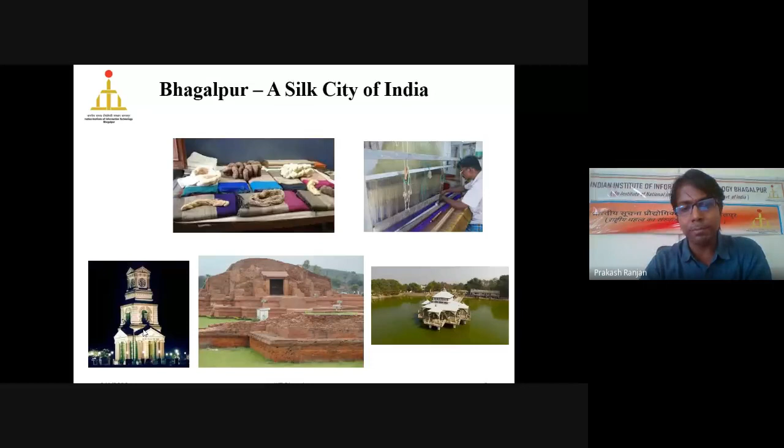Next, I would like to say a little about Bhagalpur city. It is very famous for its silk. If you Google it, you will find that Bhagalpur silks, especially silk sarees, are very famous. It is also nearby the ancient Vikramshila University, so it is a very beautiful city. IIIT Bhagalpur is right on the bank of the river Ganga, and our campus is totally greenish, with around 650 mango trees. You can imagine how green our campus is.

I would like to welcome everyone, especially Rathore sir and my friends Neha and Abhishek, to come and visit. We will have a great time here. So here we are having this webinar team for today.

I would like to say thanks to Shyam sir, Rajiv sir, and also to my colleague and friend Neha. She used to call me and have a lot of discussion. I have also disturbed her a lot of times on how to get properly prepared. So thanks for bearing with me.

One more thing I would like to tell you regarding NIT Jamshedpur. As I told you earlier, I have done my PhD from NIT Jamshedpur. You will be happy to hear that it is now called a mini IIT Roorkee, because a lot of your faculties are nowadays doing PhD from NIT Jamshedpur. You can start from Chetan Burde, who is now like an elder brother, younger brother to me.

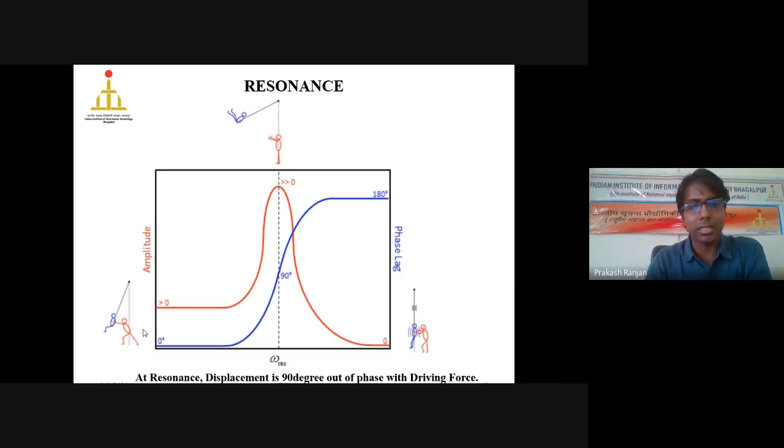So let's begin with the core topic of our today's discussion, that is metamaterials. As we have listened earlier, metamaterials are basically made up of the word meta. Meta is a Greek word and it means beyond. So metamaterial implies a material which is beyond our reach.

If you look around yourself, you will find that you have lots of materials. If you try to characterize them, meaning analyze their properties, you can place them in 4 categories. So what we can do is a simple experiment: we are going to divide available materials into 4 types, based on permeability and permittivity.

Let's remember our 10+2 physics, the electric force. The electric force between 2 charges depends upon the charge quantity as well as the medium in which the charge is placed. That medium parameter is defined by permittivity. That is why we have 1 over 4 pi epsilon naught epsilon r, where epsilon r is the relative permittivity, times q1 q2 over r square. Apart from the distance and the charges, permittivity defines the medium, which is why you can have different forces acting on the same charges if you change the medium.

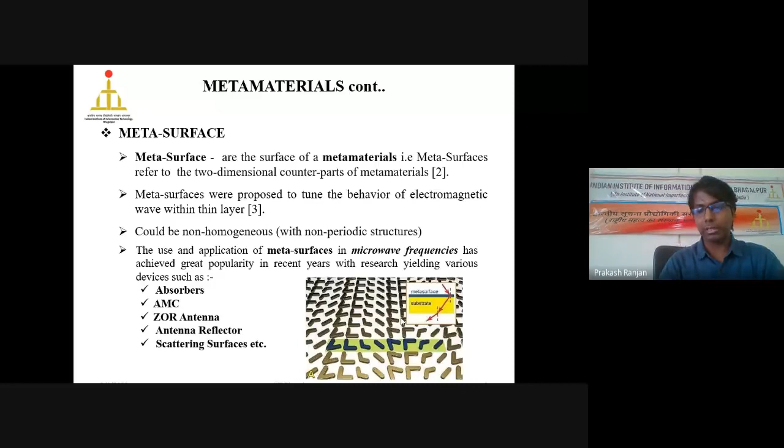As I said earlier, to have a meta surface you have to find out the property of normal surfaces of normal materials. We all know from basic physics that a normal surface has a particular arrangement of crystals or atoms, and that must be periodic. HCP, lot of things we know - packing, lot of patterns we are having. With that packing, it gives a particular periodic arrangement. So if you want to generate a meta surface, something must be periodic.

Second thing - every surface is made up of a unit that we call atoms. Similarly, in the case of meta surface, we need something which gives the unit - here we say it is a unit cell or meta atom. Also, in normal surfaces, the atoms are very small compared to the total surface size. Similarly, in a meta surface, the size must also be very small.

Now, one thing is very interesting here. If I say small or large, it is totally a subjective matter. For one person, small could be 0.1mm, but for another person, small could be 1 meter itself. A person working in the range of mm will say 0.1mm is large, but a person working in the range of kilometers will say 1 meter is nothing. So the size is totally subjective - one has to take a particular unit.

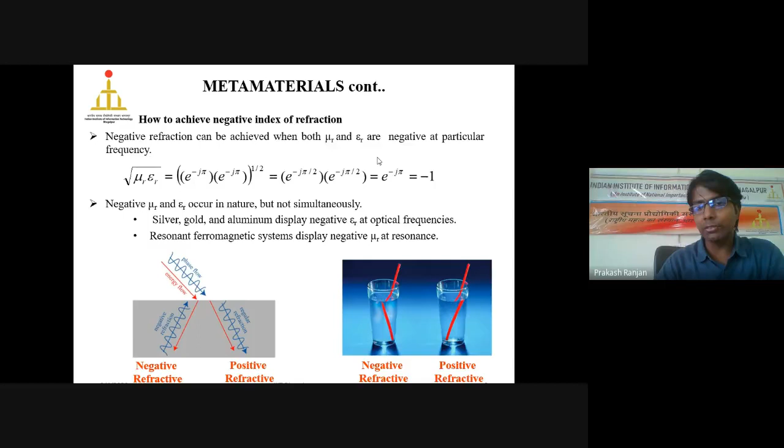That inspired scientists that if you want to tailor or change the electric behavior, that is permittivity, or change the magnetic behavior, tailor the permeability, you have to use resonance. At resonance, you always get totally different behavior. So if someone wants to achieve a material that falls into the third quadrant, when right now the material lies in the first quadrant, you have to make it leave its position from the first quadrant and come into the third quadrant — obviously you have to achieve resonance.

It's just like an ordinary experiment. If you ask your friend to leave their position and go somewhere else, the very first thing is you have to ask your friend to please stand up, right? Similarly, if I want my permittivity and permeability to fall into the third quadrant, I must ask my material to leave the property of the first quadrant. That is why we are interested in resonance, because at resonance the material changes its behavior, leaves its natural property of constant permittivity and permeability, and gives a totally abnormal behavior.

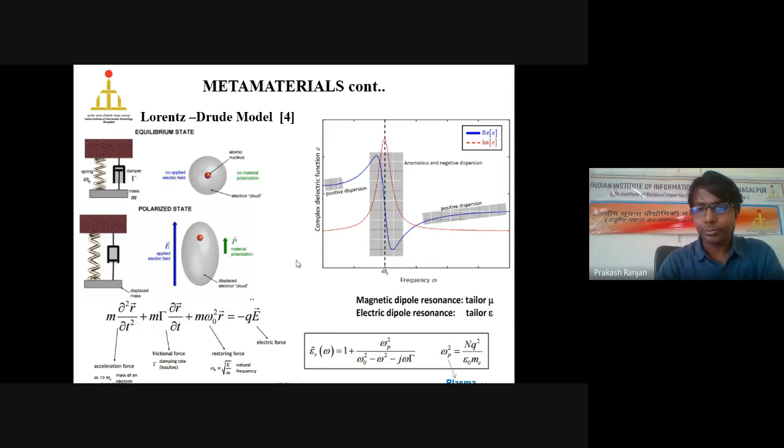Now, as you see, there is a plasma frequency term. If you look at the behavior of any material, this will give you the importance of plasma frequency. If you apply a wave of low frequency, the material will be transparent. If you further increase the frequency, it shows absorbance property. Then later on it gives reflection, and above the plasma frequency, it becomes transparent once again. So the plasma frequency gives you the frequency at which your material becomes transparent.

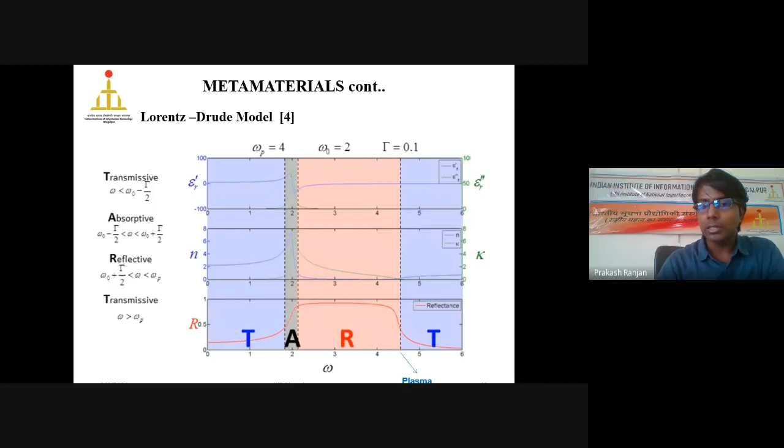And this is very much applicable — look at metal sheets. Metal sheets are very shiny in light. The reason is, apart from the skin depth property and the lossy nature of the metal for electromagnetic waves, the plasma frequency of metal sheets is much higher than that of the light wave, and that is why the wave gets reflected from the metal sheets.

So here it is the history, as I said earlier. The Veselago, I have discussed earlier, in the year 1968, he predicted something.

Later on, in the year 1996, Pendry, the figure I have brought in the left side bottom, was working on the experiment of bringing down the plasma frequency of any material, and indeed he ended up with the discovery of metamaterial. He is actually, I would say, the father of metamaterial. Later on, the work has been forwarded by Smith and Shelby, the right side figure. So these are the people, these are actually the inventors, I would say, of the metamaterials.

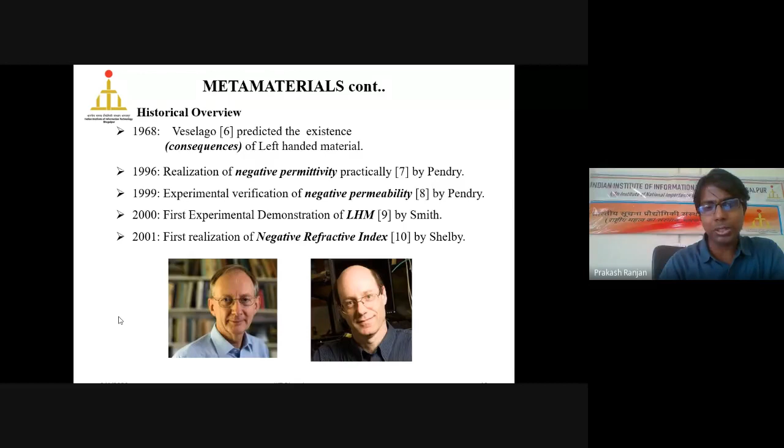So in the year 1996, you got the first experimental verification of negative permittivity. Later on, in 1999, negative permeability. In 2000, you have the first experimental demonstration of left-handed material, that means both negative permittivity and permeability. And now in 2001, by Shelby, you have the proper negative refractive index. So it is by and large, we have just passed 20 years down the line where we have achieved the metamaterial.

As I said earlier, in order to achieve the metamaterial property, you need to have electric resonance. The question is, how do we achieve the electric resonance? The answer is very simple: you just take a wire, make it in the range of lambda, and it will give you the resonance property. Similarly, for magnetic resonance, give a circular shape to the resonating structures.

This led into the electric and magnetic resonance simultaneously, and once you have electric and magnetic resonance simultaneously, there is a chance that you will achieve the metamaterial, and that is exactly what happened with Smith in the year 2000. He has demonstrated the metamaterial practically.

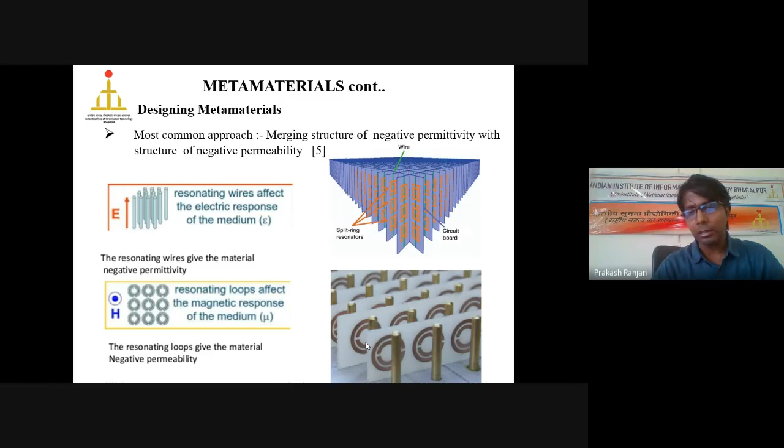So now let's get into the application of metamaterials. These metamaterials have very interesting applications. One of the very interesting applications is cloaking.

So you can remember, especially my students, the movie Mr. India, the old movie, where the hero Anil Kapoor used to become invisible by pressing a simple button on a watch on his hand. He used to press a button and he becomes invisible. A similar story is shown in the Hollywood movie Hollow Man, where he injected a material and by that injection he becomes invisible. The same thing people have been able to achieve using the property of metamaterial at a particular frequency.

People have achieved this invisibility at a particular frequency. It is a matter of time before people come up with a device that will give invisibility in the visible spectrum. Once it gives invisibility in the visible spectrum, you can make things invisible. This is a totally innovative area people are working on these days, using meta surfaces and metamaterials, and due to that property only it has been achieved at a particular frequency. Let's see, the time will come when one of you will work on this topic and achieve cloaking for a particular band of the spectrum.

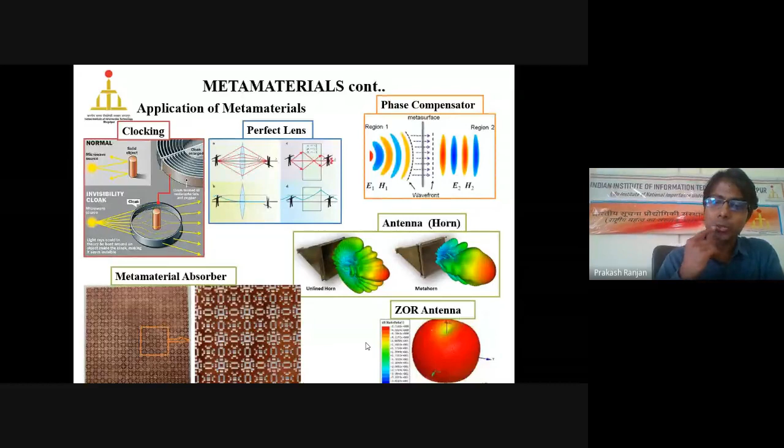Second thing is the metamaterial absorber. The metamaterial absorber, by its name itself you can guess its property. It absorbs electromagnetic waves. Remember the stealth plane. Your fighter planes nowadays are stealth planes. The stealth plane has the property that it absorbs the incident wave coming from the radars, and that is why it is not visible to the radars. That has been achieved with greater efficiency by metamaterials, and that is why it is termed as metamaterial absorbers. So in this presentation, I will give more concentration towards your ZOR antenna and metamaterial absorbers.

To work in this microwave domain, I would like to introduce two softwares which are very much famous these days: one is CST and another is ANSYS HFSS. There are other softwares like FEKO and Tarang. Tarang is Indian developed, but it is still in the development phase. I would not say it is totally matured, but CST and ANSYS are both matured commercially available softwares.

Even though it costs much, you can even find a crack, but you have to use these softwares to simulate the structures. We at IIIT Bhagalpur have introduced these softwares in the BTech curriculum itself, so that students passing out from IIIT Bhagalpur will have a little bit of flavor of microwave. These simulations have been done at IIIT Bhagalpur by the students themselves. So you can convince your students to work in this domain, provide them the software, and teach them so that they can work in this field.

So this is the simulation of simple E-plane and H-plane.

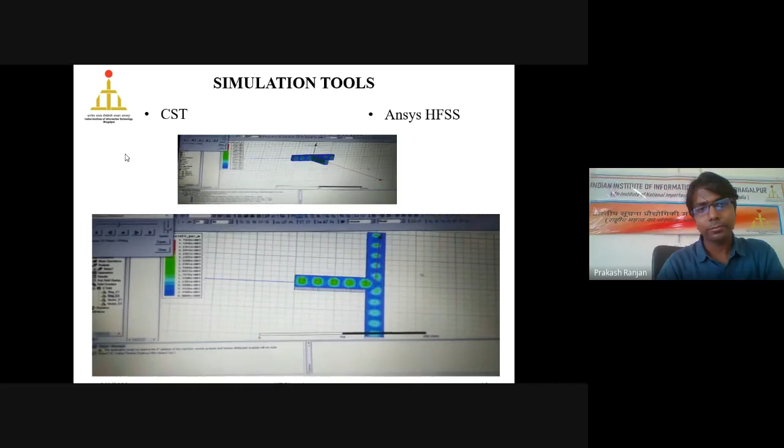Let's try to analyze the metamaterial in terms of a transmission line, with the help of the basic transmission line model. We all know that basic transmission lines can be modeled with simple R, L, G, and C, where resistance, inductance, conductance, and capacitance are used as parameters. We can model any transmission line using these four parameters. Now if you look at the lossless transmission line, imagine your transmission line is lossless - what we are actually trying to do is model a transmission line made of metamaterial, so that we can extract information and apply it for practical application.

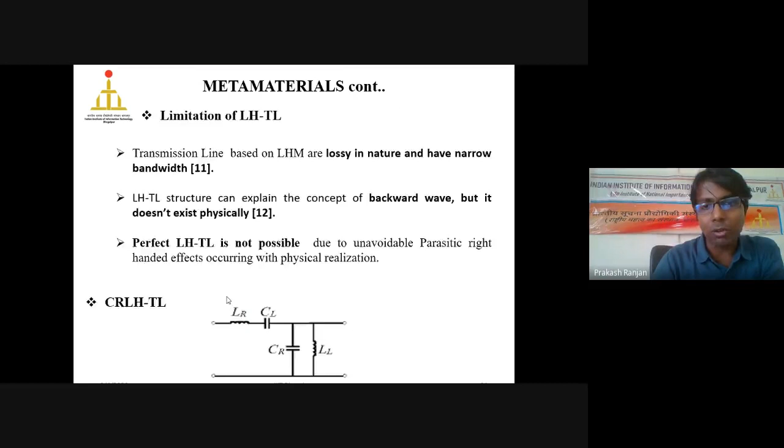So if you have a composite structure, obviously the diagram of beta versus frequency must be combined, because you have to combine the circuit. We are going to combine the purely right hand transmission line circuit with the purely left hand transmission line circuit. Then obviously the graph you get will be the combination of both these two graphs.

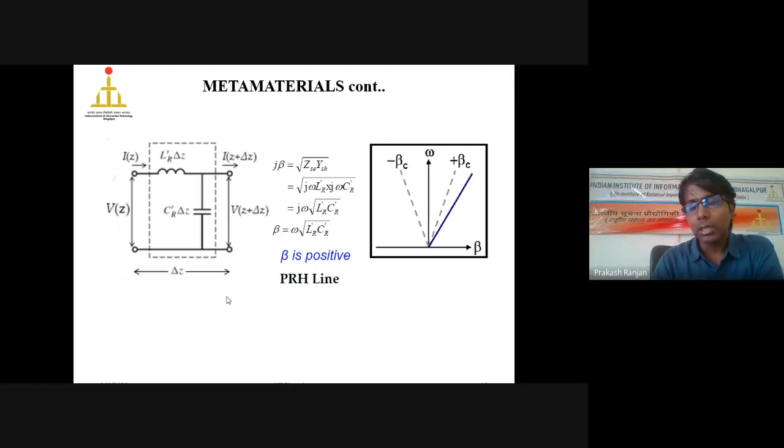Look at this - this is for the right side I'm talking about. The right side graph is the omega versus beta diagram for your purely right hand transmission line. This is for your purely left hand transmission line. So obviously, if I combine these two, it will give the graph for omega versus beta of the composite structure.

Now, if you look at this diagram, one thing you can notice is that there is a point where beta could be zero. The right side is for right hand, the left side is for purely left hand. Here you see the diagram for purely right hand transmission line, and this red side is for the composite one. For the composite one, you have the property of both right hand and left hand transmission line, and that is why you are able to achieve a point where beta is 0 at a particular frequency.

Now, beta 0 - why am I giving more stress on this? From our basic things we know that beta is nothing but 2 pi by lambda. So 2 pi by lambda, where beta is 0 means your lambda is infinity, right?

Now I haven't noted this down, but think of it this way: at a particular point in the diagram, beta is 0. Beta is defined as 2 pi by lambda, so if beta is 0, lambda is infinity. That means at a particular frequency the system behaves such that it gives apparently infinite lambda, just like an ideal op-amp has infinite gain with respect to input voltage, although it has a finite value. Similarly here it gives infinite lambda.

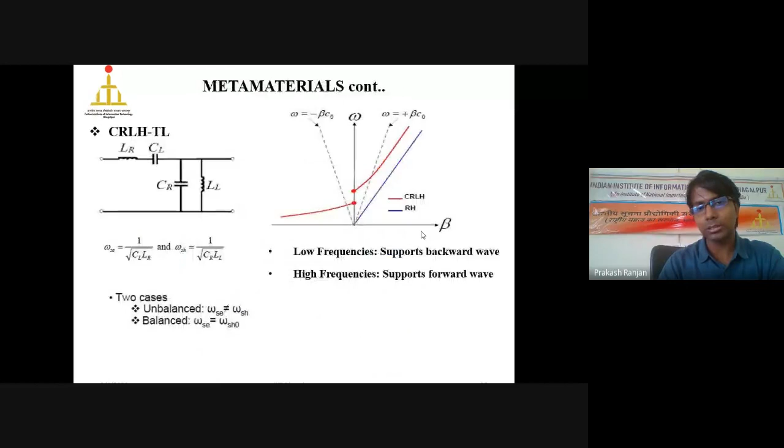So this has been achieved because of the resonance and of ZOR, because of the composite we have achieved. This basic concept of ZOR, or zeroth-order resonance, which I discussed earlier in transmission lines, has been useful to derive this ZOR antenna, and is very much useful.

If you look at the advantage that ZOR antenna brings, the basic things are: one, reduction in size, and second, the radiation pattern. These two things make ZOR antenna very much applicable.

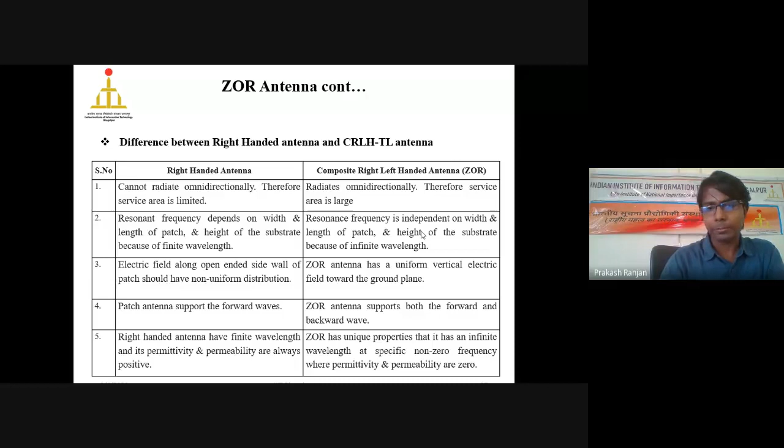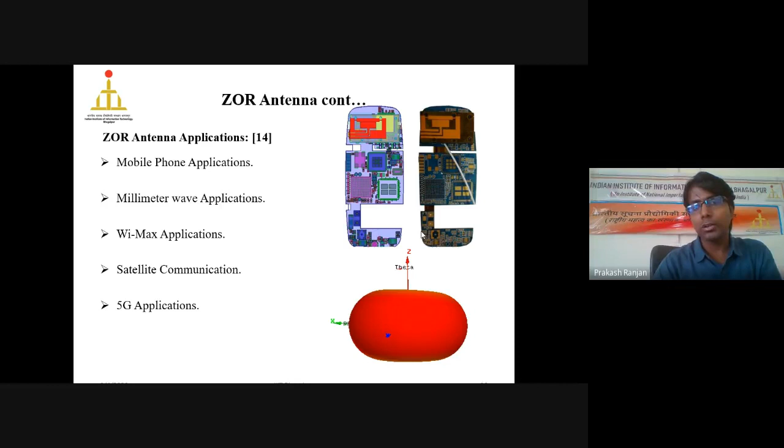In the very near future, you will see ZOR antenna being utilized in your mobile phones. Nowadays you are using the PIFA antenna, but soon you will observe that the same ZOR antenna is going to be used in your mobile phones, because it gives better gain as well as better radiation pattern. These are a few antennas, and this is the measurement setup of the antenna.

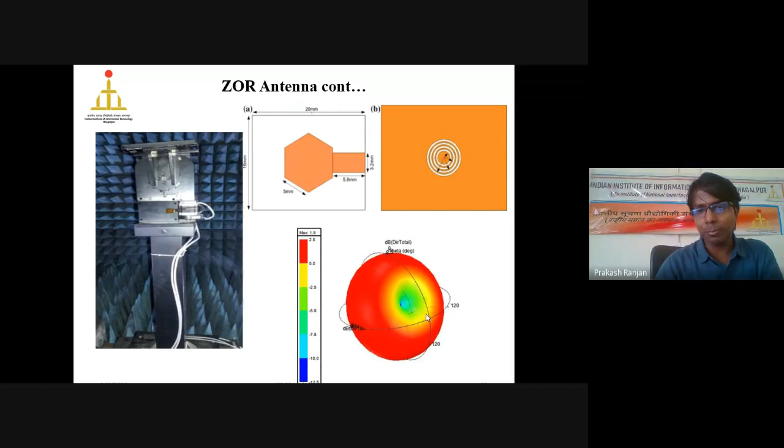These are another type of ZOR antenna. See, this one has a totally apple-shaped radiation pattern. Again, these are a few shapes that have already been published. So these are a few ZOR antennas.

With this, the basics of ZOR antenna covered, let's enter into absorbers. As I stated earlier, I will discuss two applications of metamaterials. One application was the ZOR antenna, and the other application is absorbers.

I'd like to give a little historical overview of absorbers. Our renowned scientist Sir J.C. Bose used absorber material in his oscillating tube device to reduce unwanted reflections occurring in his machine. He developed the oscillator tube, and that tube was giving some abnormal behavior because of the metal casing. So he brought a kind of material and placed it inside that casing so it would work properly. That was the first such work, I would say, in India.

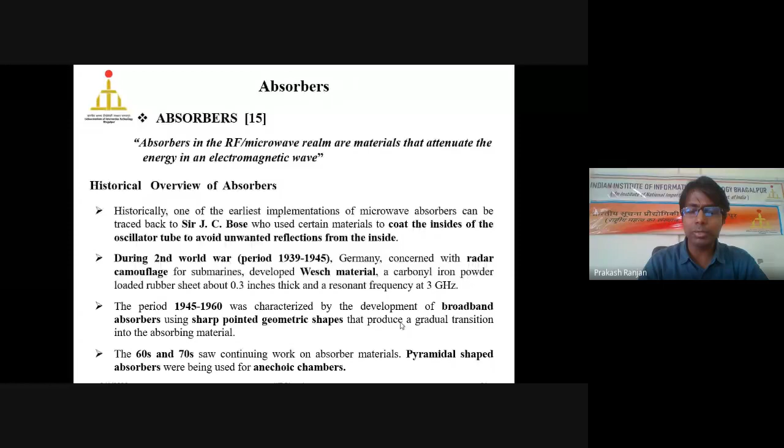Later on, absorbers became very useful in the Second World War, and progressively in the 1960s. One of the absorbers which is very famous, I would first discuss the conventional type of absorbers. If you look at conventional types of absorbers, there are two basic categories: one is the multi-layer type, and another is absorbers made up of dielectric materials.

Look at multi-layer absorbers: these are derived by simple stacking of different kinds of materials. But if you look at the other type, the pyramidal type structure absorbers, these are very famous for anechoic chamber applications. This has the advantage of giving broadband absorption, but the drawback is that it is very fragile.

To show you the application of absorbers, I would like to share something I came to know through the DRDO Pune lab. India purchased the Rafale fighter plane, which comes with a host of new technology. Among them was stealth technology, the stealth coating. France was not ready to share this technology at any cost. They said they could share all other technologies except the stealth coating technology.

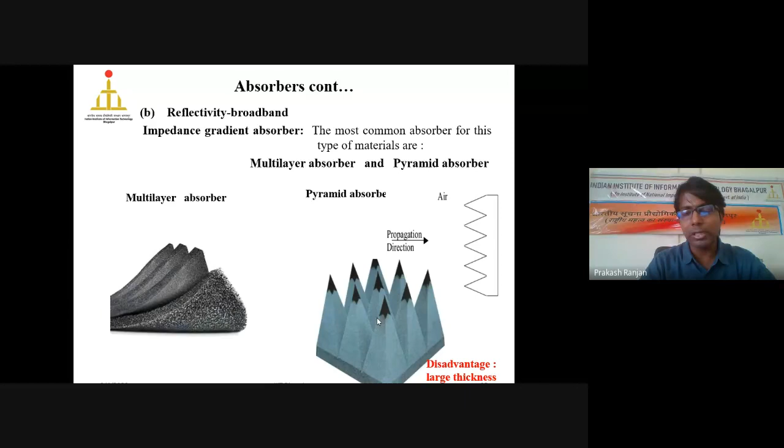So the basic principle of absorber, you all know its purpose is to absorb the materials. The absorber's purpose is nothing but to absorb any incident wave. So I would like to try to enter into the metamaterial absorber.

Metamaterial absorber is basically a 3-layer structure. The bottom side is always copper. The second layer will be a dielectric material, and the topmost layer will be a resonating structure. With this arrangement, you are able to achieve the metamaterial absorber.

So we all know that if there is a metal backing, the microwave is not going to cross this system. So with this structure, I can say this S21 becomes 0. This is the S parameter of microwave.

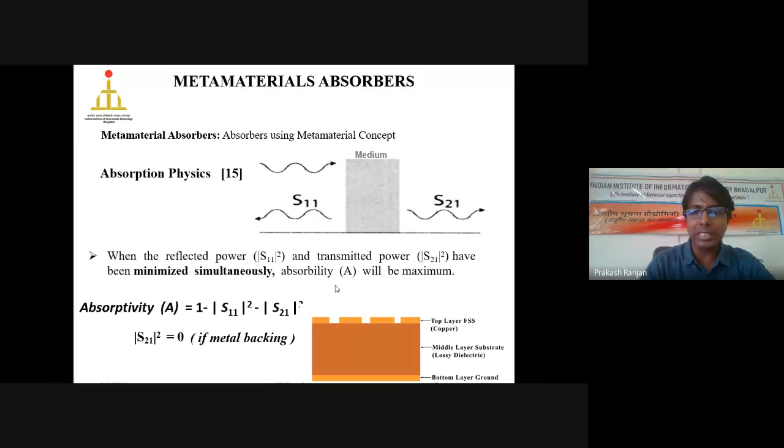So this is the incident wave, this is the reflected wave. You can see in the diagram, S11 is written there. S11 shows the reflected wave, S21 shows the transmitted wave. So as there is a metal backing, there will not be any transmission, so there is only reflection possible. So now I can measure the absorption behavior of the whole system by just measuring the reflected wave.

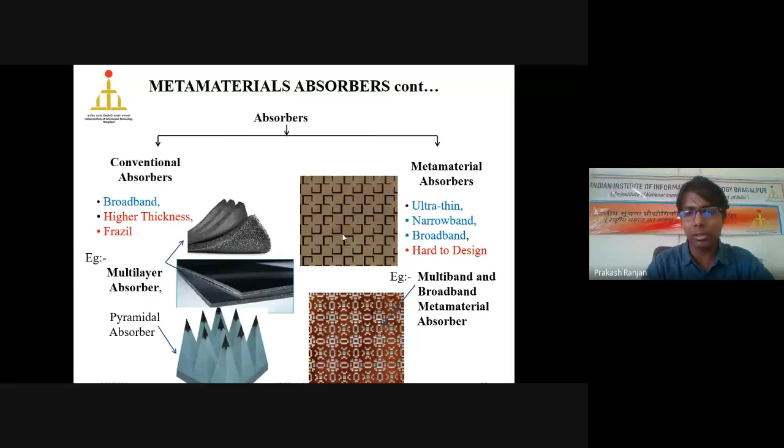So here is a diagram of the conventional absorbers and the metamaterial absorbers. We at IIIT Bhagalpur have worked on multi-layer absorbers as well as metamaterial absorbers. We are also working on multi-layer absorbers where you stack different materials, and these are a few diagrams which I will show you in the coming slides, which have been developed by ourselves at IIIT Bhagalpur. Now let's have a small discussion about the multi-layer absorber.

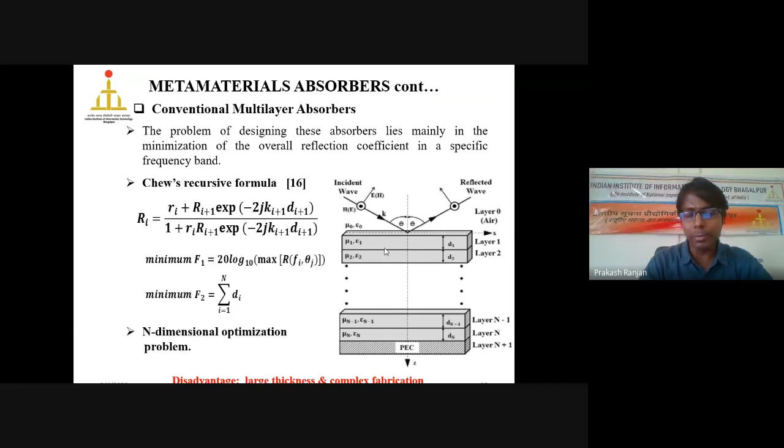We all know multi-layer, by name itself, is where you are stacking different materials with different thickness one over another to form a multi-layer absorber. Now this multi-layer absorber, if you look at it, makes an optimization problem. You can treat the synthesis of a multi-layer absorber as a problem of optimization, because you need to find out the correct material with its correct thickness and along with its correct position. With this, we have come up with results, I will show you a few of them in coming slides. So this makes an optimization problem.

Now getting back to the metamaterial absorber. The working principle of any metamaterial absorber is that when a wave gets inside the surface of the metamaterial, it just gets absorbed. This is possible only and only if there is no reflection from the surface of the metamaterial. So if there is no reflection, this is the impedance of the wave in terms of a metamaterial absorber.

This is the basic formula of electromagnetic theory, we can note it down. So if I apply this basic formula, it says that this Z omega is equal to eta naught only and only if the complex quantities become cancelled to each other. So if this complex quantity is cancelled to each other, it means they must separately be equal to each other. That means the real part of epsilon and mu must be equal to each other, and the imaginary part of epsilon and mu must be equal to each other.

Now with this formula, you must get an intuitive idea of why we are interested in metamaterial. Because to design the metamaterial absorber, we are tweaking epsilon and mu in such a way that at the absorption band, these two become equal. Once these two become equal, the wave gets inside and gets absorbed by the system.

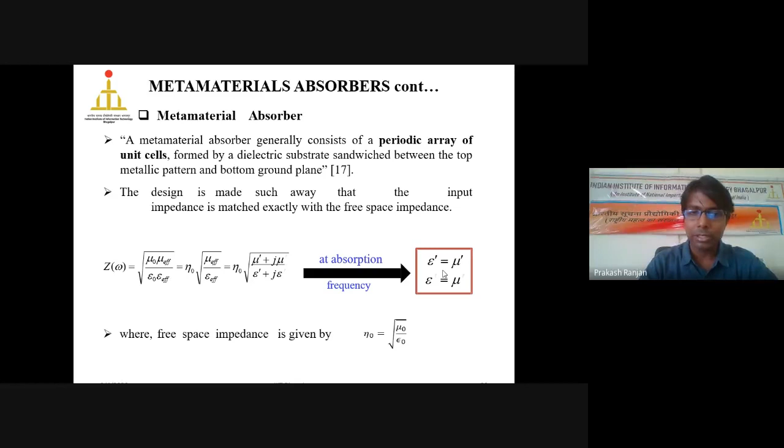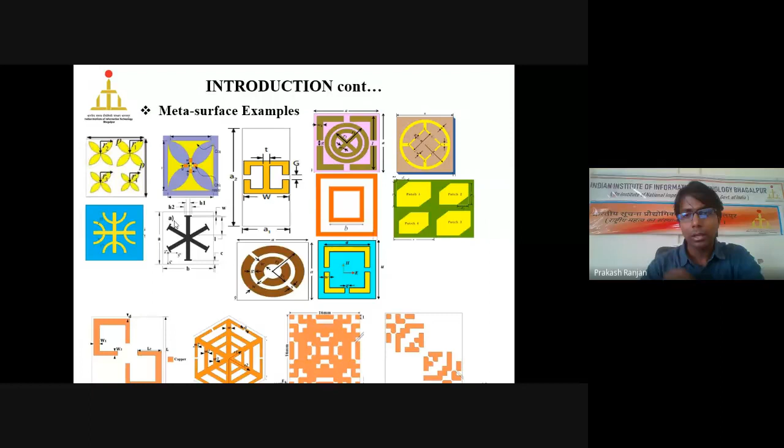So I will show you how we overcome this problem. But with the same technology, using hit and trial, we at IIIT Bhagalpur have developed these absorbers.

This leads into application of radars, where mostly radars basically work in the X band domain. Now radars are also available for L band domain. Russia has developed for that, but mostly radars are working in X band domain.

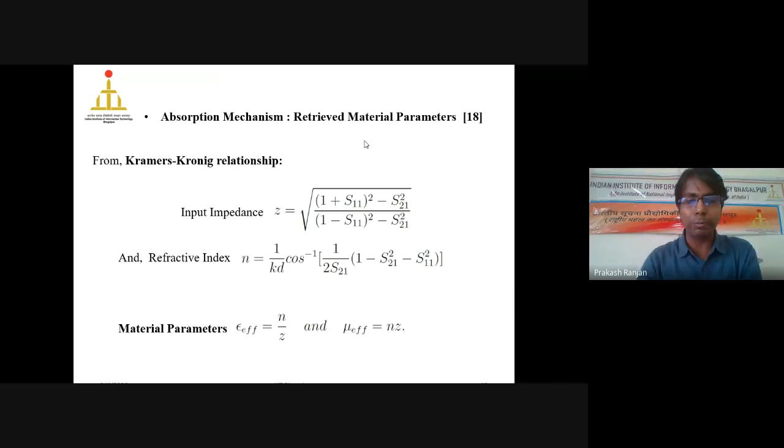So to analyze this property of absorption, we have derived using this theory few formulas like Kramers-Kronig relationships and other things, which lead into analysis of this absorption.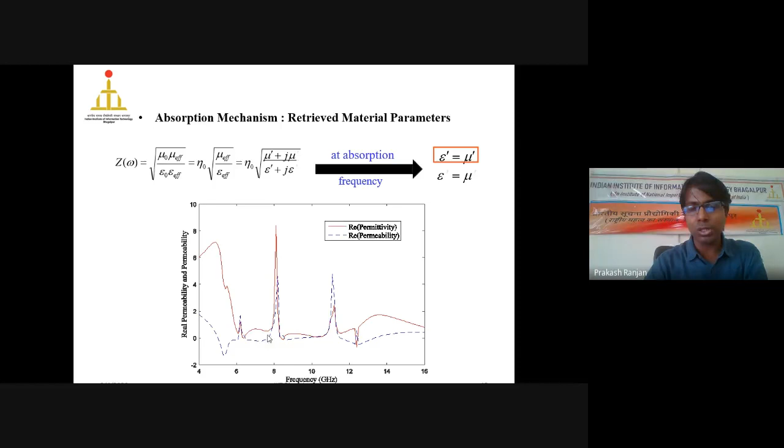Later on, we further analyzed in terms of effective parameters, that is mu and epsilon. You see the epsilon, both these real quantities are very much close to each other during the absorption band. You see the diagram, both these quantities are very much close to each other during the absorption band.

Second thing, we have also analyzed its surface current density. You see the surface current density, it gives the top and bottom current in reverse direction. This leads into the conduction, displacement, and conduction current, and once again the displacement current, that will lead into the complete cycle. So these are basically the analysis of how absorption takes place.

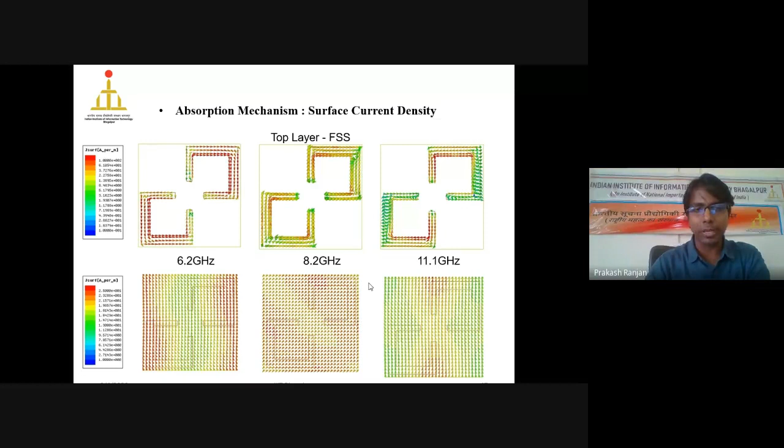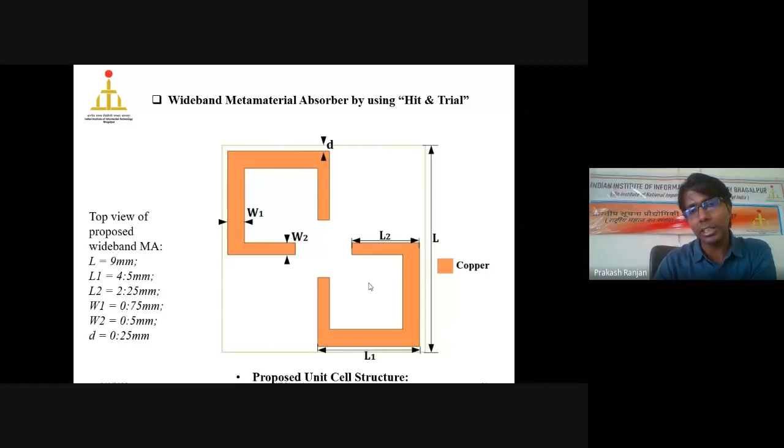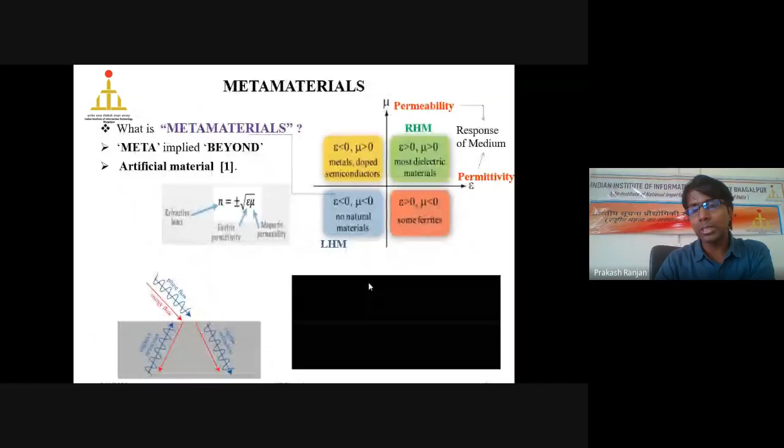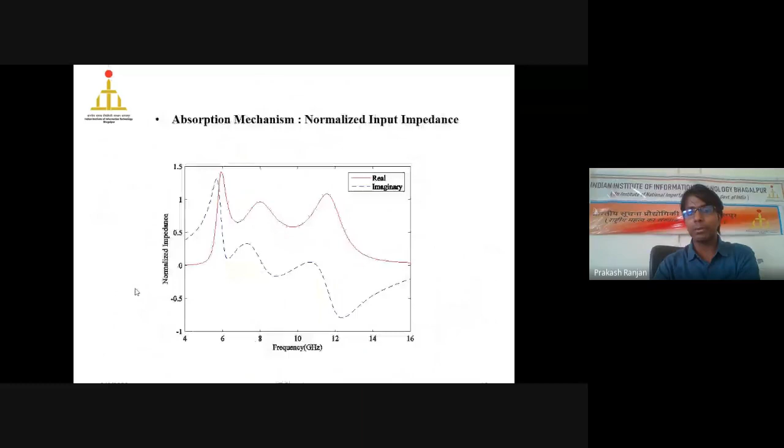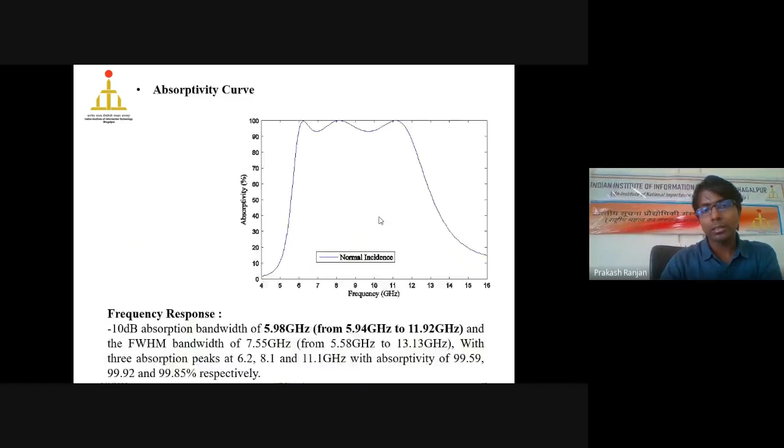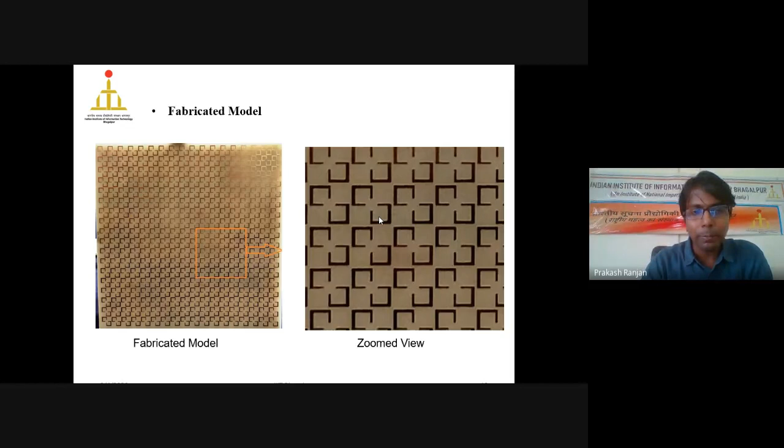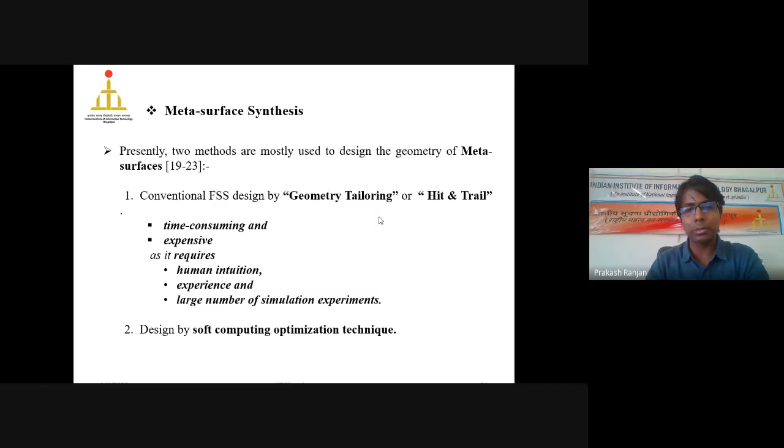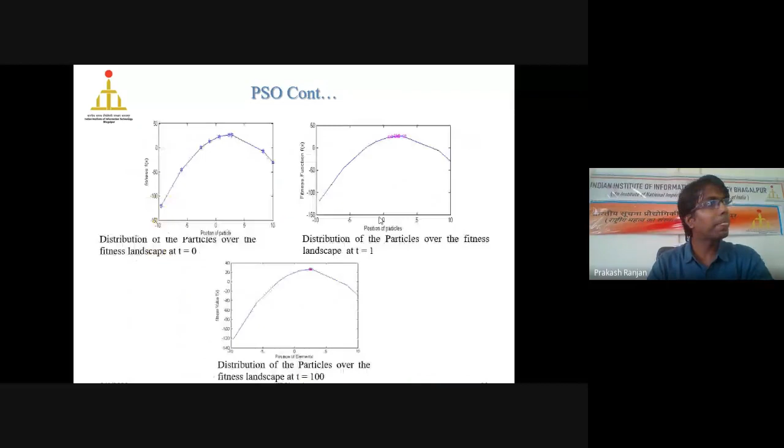Before concluding, I would like to show you one thing - you can use the soft computing approach to design these absorbers. I have brought a lot of things, but in near future we will discuss that. So these are for your future purpose, I am leaving it, so you can explore.

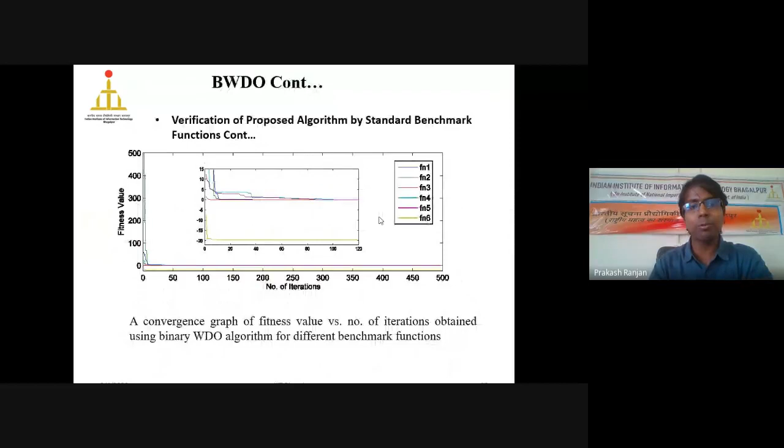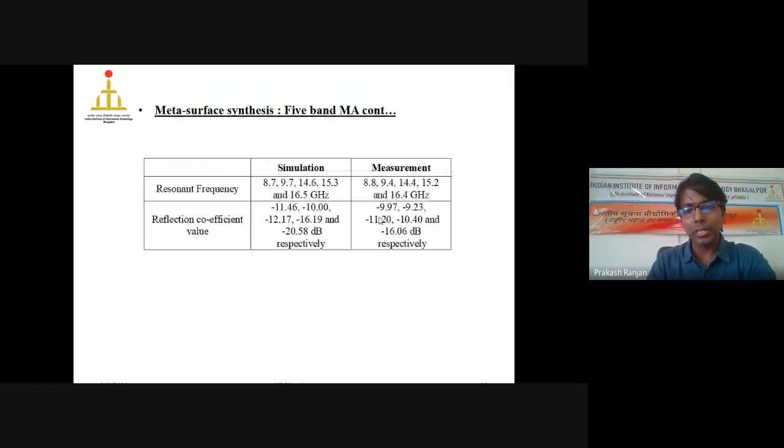So here we are using the soft computing approach to solve this problem, and we are designing different absorbers. Look at this, using the selected technology, we are designing different absorbers. Look at this, lot of absorbers we have designed for different applications. So you see the fabricated models - these are the fabricated models designed using the soft computing approach.

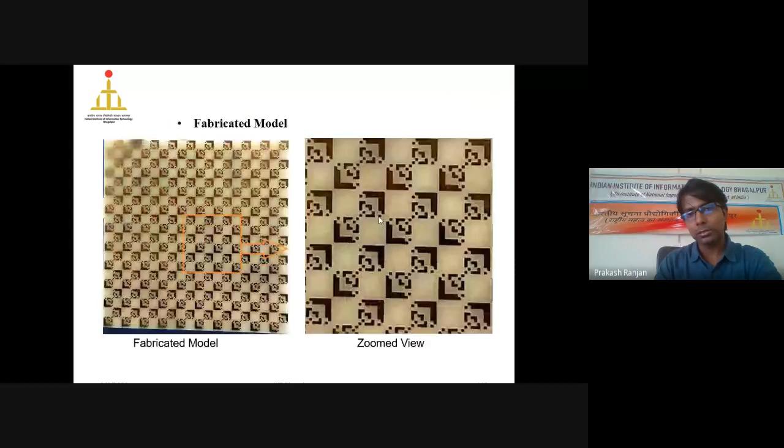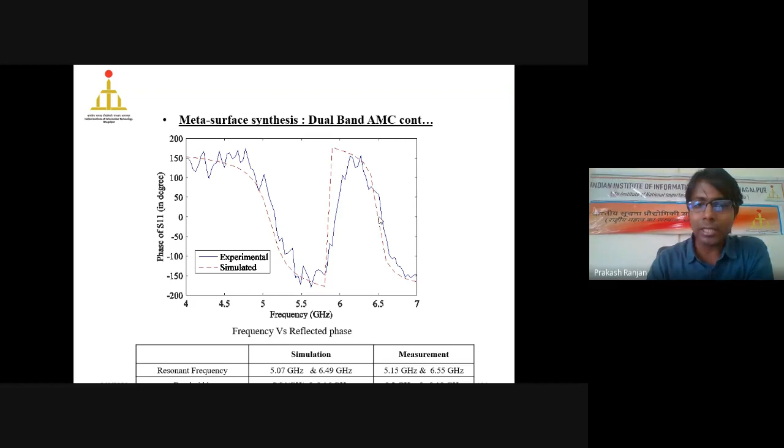I'm showing these results so that this should give encouragement and attract our friends to work in this domain. So with the time constraint, I'm concluding.

So with this, I am concluding. I wish I would have had much more time. I wish next time I will ask my friends from Truba to come and work in this domain, have a collaborative work, come and do your PhD here. You are all welcome. This is your next home, I would say.

For me also, I have been listening so much that many friends have been coming from there to join PhD at NIT Jamshedpur. Now I wish the same tradition continues at IIIT Bhagalpur also. So hereby I am inviting all of you to come and join us, do your PhD here if you are not having PhD right now. You will find this is just like a home, just like Truba. You will know IIIT Bhagalpur will be next to your home.